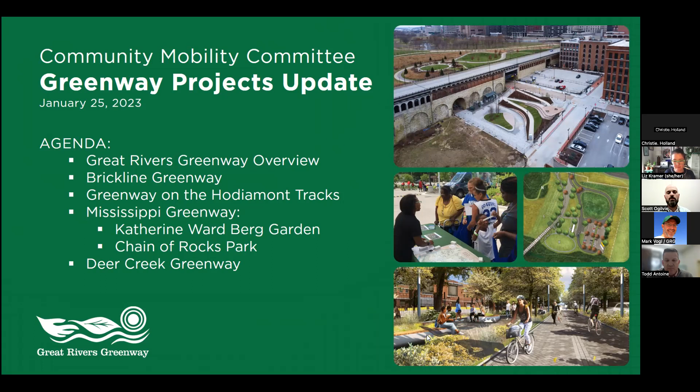As Christy said, we're going to talk about Brickline, the Hodiamont Tracks, and then a couple projects within the Mississippi Greenway, then we'll finish up with Deer Creek. I believe everybody on this call probably knows all about GRG, so I don't want to waste too much time with an overview of our organization. But just for those of you who might not be completely familiar with us, we are the Regional Parks and Recreation District in the St. Louis region. We operate in the city of St. Louis, St. Louis County, and St. Charles County. We're funded through two different sales taxes, and we are actively building projects in 18 different Greenway corridors around the region. We're doing our best to work with partner organizations, administer federal grants when possible, and we've got a foundation that supports us as well, providing some critical funding for moving a lot of projects forward from one end of the region to the other.

So the projects we want to share today, this is just sort of an overview of how they connect with each other here in the city of St. Louis. We've got two projects in Mississippi Greenway: up at the northern end is Chain of Rocks Park, associated with Chain of Rocks Bridge, and then near downtown is Katherine Ward Berg Garden. Brickline Greenway is a really massive project connecting a lot of different neighborhoods in the heart of the city. And then transforming the old streetcar line on the Hodiamont corridor into a greenway, and extending the Deer Creek Greenway from River des Peres west through Maplewood and into Webster Groves and Brentwood. And just as a reminder, our whole mission is not necessarily to act as a typical or traditional park and rec agency, but it's really to make these connections between parks and other destinations around the region. We do that by constructing trails, conservation areas, adding amenities and trailheads, and ultimately providing connectivity around the region.

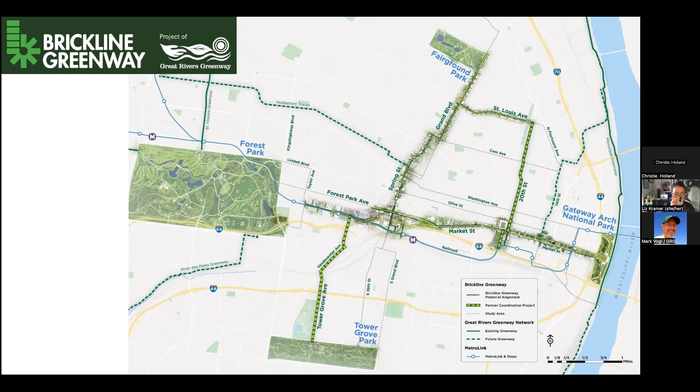So it's really different from other Greenway projects we're building around the region that tend to be one single line. This one is really a network within the greater Greenway system. As you can see, there are a lot of different routes. We're studying some parallel connections and loops, but it's really intended to connect a number of really great neighborhoods in the city with four outstanding parks and lots of other destinations along the way.

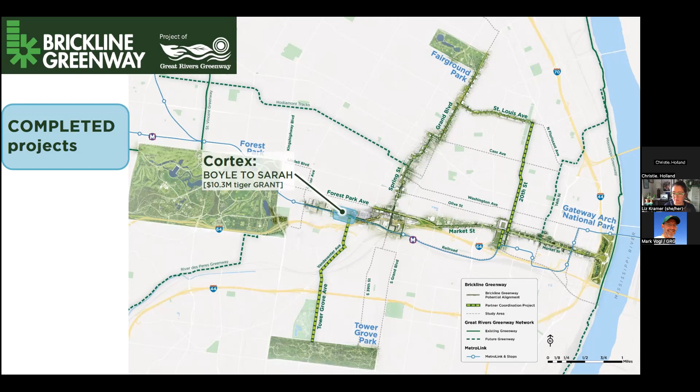Want to share some status. We actually built a small portion of what was then Chouteau Greenway, but it's part of Brickline Greenway, with the new Cortex Metrolink station that opened in 2018.

We have a series of projects underway right now. We're building a section from 22nd Street to 20th in association with the new Major League Soccer Stadium along Market. We've been awarded a CMAQ grant to build a connection from the Cortex station to the Grand Metrolink station within the Metro corridor. We're actively designing a section along Mill Creek Valley that'll extend the Greenway from the Major League Soccer Stadium west along Market Street to Compton, touching on Harris Stowe State University and the Wells Fargo campus.

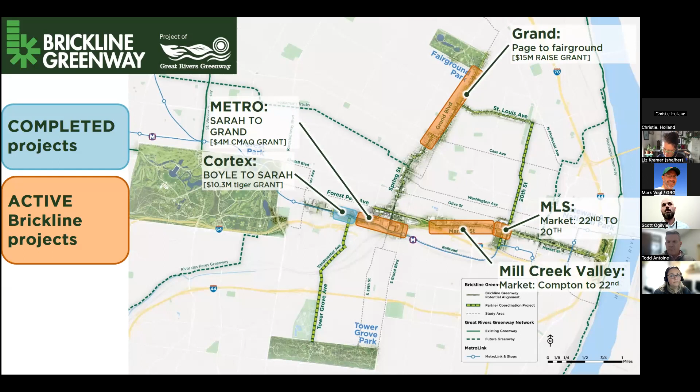And then a couple of really exciting projects going north along Grand Boulevard from Fairground Park down into Midtown. We're receiving a RAISE grant for that, and then extending it along Spring Avenue to the St. Louis University campus.

We'll be studying, we just have a concept right now, a connection along St. Louis Avenue, on the northern edge of the NGA. And we've just finished a feasibility study to develop a crossing from the Foundry to the Armory through the east and westbound lanes of I-64, breaking down a really critical barrier for north-south access in that location.

We've submitted for a Reconnecting Communities planning grant that hopefully will allow us to continue moving that project forward. And we're in discussion with the Washington University Medical Center, BJC, and Cortex about extending the Greenway from the Cortex Metrolink station west along Clayton Avenue into Forest Park at the location of Clayton and Kingshighway.

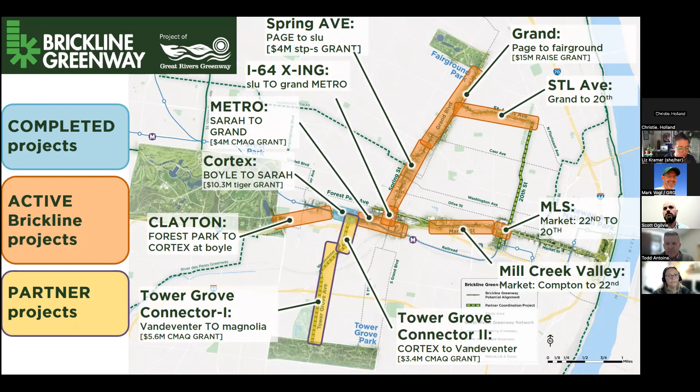We're also partnering on a few projects with other city departments. Of course, the Tower Grove connector—this one will be going to bid soon. There's a second phase of that project that will bring us up to the Cortex station at Sarah. And then 20th Street, from Major League Soccer Stadium at Market all the way up to St. Louis Avenue.

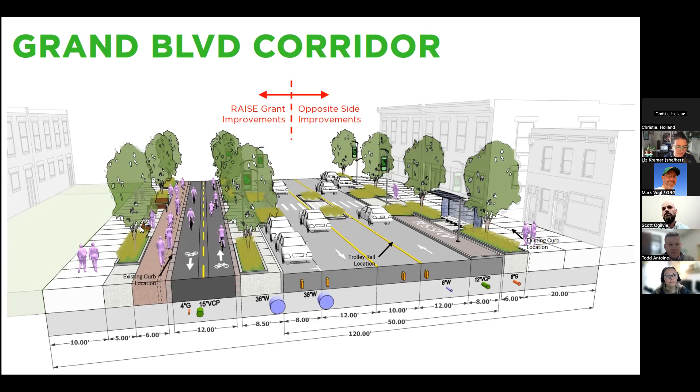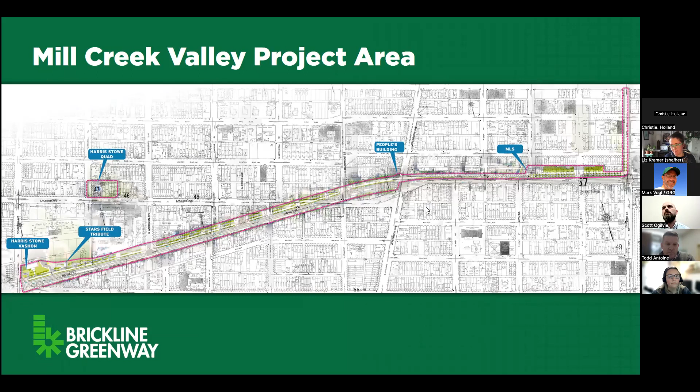22,000 primarily Black families and residents were displaced from this neighborhood in the late 1950s to give way to what was then called urban renewal. And this is the development pattern of the same area today. I'll toggle back and forth a couple of times so you can really get a sense for how dramatically that neighborhood has changed.

This is the new soccer stadium on the right-hand side. Again, this is Market Street. We get to the intersection of Jefferson and Market at this point. This was the location of what was known as the People's Building. It was the center of the neighborhood. A lot of the institutions and businesses were centered right there. It was really the heart of the neighborhood in a lot of different ways.

We're working with a local artist, Damon Davis, on ways to commemorate the neighborhood and some of the places that existed along the way. And then as we get further west, closer to the Harris-Stowe campus, we pick up Stars field, which was the location of the Negro League Stars team back in the time of the Negro Leagues. So again, a lot of opportunities for commemoration and interpretation.

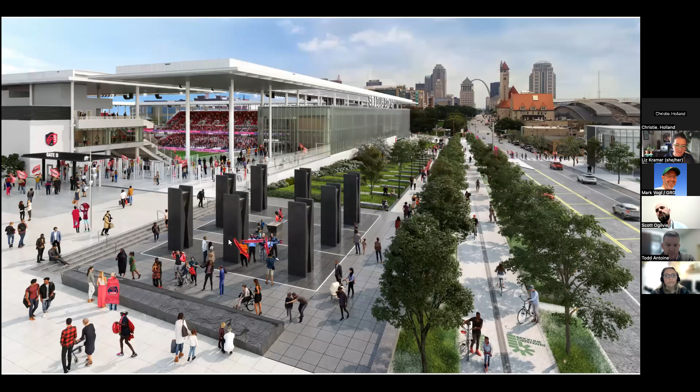This is a rendering, an early rendering from a couple of years ago that showed the design of the Brickline Greenway next to the soccer stadium.

And this is the Pillars of the Valley, the monument that Damon Davis has designed, again to commemorate the neighborhood that was there. In the distance, you can see these seat walls that are located at the actual lot lines of the residential properties that were there at the time. And so when you have a chance to go out and experience this yourself, we have the addresses of those former residences, and you really get a sense for how densely developed that neighborhood was and what we lost as a community.

These are some photos of the project as it is completed. I mentioned the importance of being accurate in our renderings for North Grand - we want to make sure we're delivering on those designs as accurately as possible. Each one of these pillars is a symbolic hourglass. The intent is to show that time has stood still. On the inside of each of these panels is a quote from a resident who used to live there. And then some photos taken just last week of the Brickline construction going in.

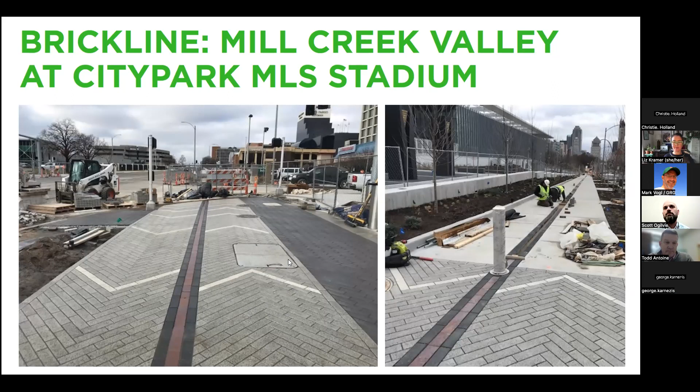This is the actual design element that will be consistent throughout the Brickline Greenway from one end to another. As we get closer to intersections, we have these chevron patterns in the pavement that will be a warning to people that they're coming close to an intersection. So it's both an aesthetics thing, but also a safety measure to warn people they're getting close to a zone of traffic. And then a sort of before and after of what that zone along Market may look like.

Here we go. The idea is to use some of that additional lane of traffic for the Greenway development, and then on the northern side of the corridor, more of a pedestrian zone for seating areas, hopefully an enhancement to the Harris-Stowe campus as well.

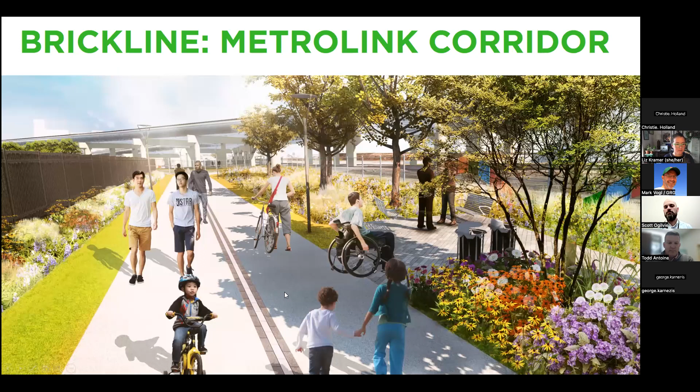This is a rendering of the zone between the Grand and Cortex Metrolink stations within the Metro right-of-way. It's a very narrow corridor, but through the use of landscape, paving, and safety measures like fencing and lighting, we think this is going to be a really nice user experience to go from one end of the corridor to another and access a lot of those new developments popping up in the area, like the Foundry and the Armory and others.

And then I'll turn it over to Todd to talk about a new position we're undertaking with respect to equity and economic development. Great, thanks, Mark.

So Chris Peoples, who joined us about a year and a half ago as a project manager, recently took on a new role with us here at Great Rivers Greenway. He's now our Equity and Economic Impact Director, and he is focused primarily in the city of St. Louis, looking at opportunities where the greenways are going in, the Brickline being a prime example here, working on how the greenway can help benefit economic development and revitalization along the various neighborhoods. His position is funded partially from St.

Louis Development Corporation, as well as from several private institutions, some of the banks we have here in town, are helping to fund his position. You can kind of look at the various things that he's just getting started on. He just started working in this position in the fall, so he's getting up and running.

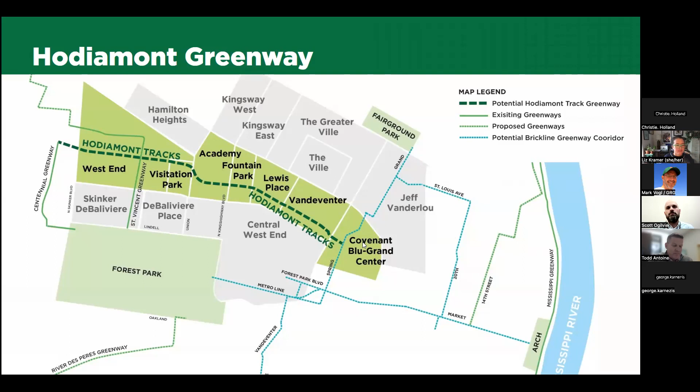We conducted a whole series of community events and surveys. We had a lot of outreach to determine if people really wanted to transform this old infrastructure into something different. We've worked with the residents of these 7 neighborhoods that follow the potential Greenway, and we've determined that there's quite a bit of support for reinvesting in this old transit infrastructure and transforming it into something else.

We're continuing to do a lot of design work, working with a really creative design team on ways to transform that old streetcar line into an open space that will function for everybody.

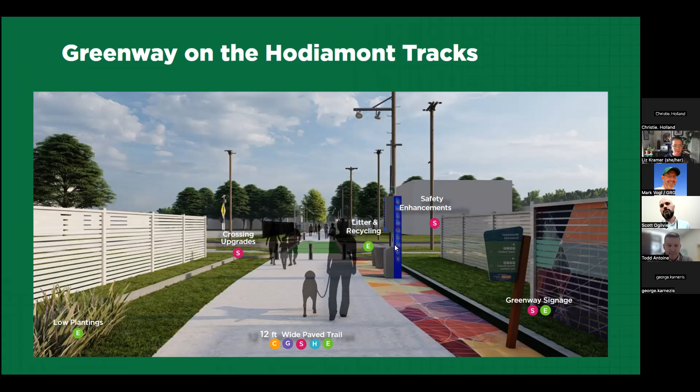This is a really interesting diagram. The letters shown throughout correspond to different goals that the community said were important, whether it's safety, environmental quality, connecting communities, or whatnot. Every design element they're incorporating goes back to a value or a goal that the community told us was important. I think they're really doing a great job coming up with ideas for enhancing the corridor and trying to raise the value of the neighborhoods along the way.

There's paying particular attention to the road crossings, of which there are many from one end to the other on the 3.5 mile route. We want to make sure those are as safe as possible for the Greenway users. Some of the elements they're incorporating are to narrow the street, to slow traffic, and give people a visual cue that they're coming up to the Greenway.

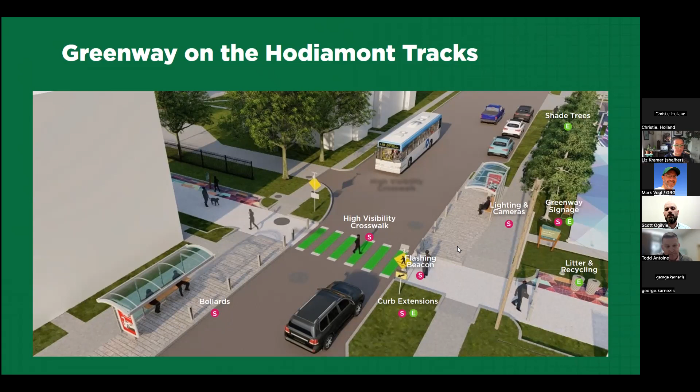Also working with Bi-State on the potential for relocating and providing more enhanced bus facilities. We recognize that the Greenway will not just be a recreational corridor, but will be used by people to access transit and get to other destinations. So as much as we can make this Greenway function for a wide variety of people, make it as safe and attractive as possible, that's some of the goals we are undertaking.

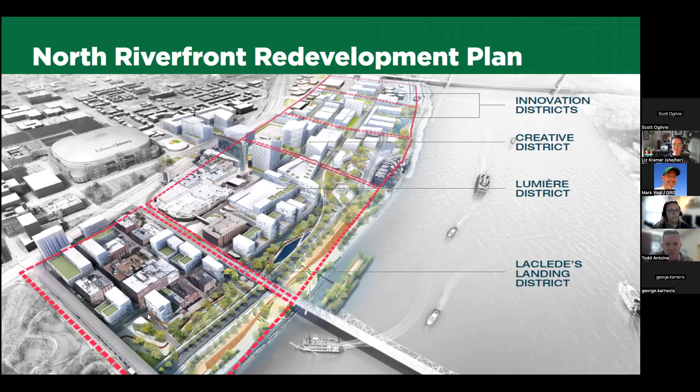You can go to the next slide. A number of years ago, 2015-16, we worked with the city and St. Louis Development Corporation on what was called the North Riverfront Open Space and Redevelopment Plan. This is one of the slides showing at the time what a continuous open space area could look like, with Eads Bridge at the bottom of the screen heading north—an enhanced open space with improved access for pedestrians and cyclists, but also an economic development plan looking at infill and redevelopment within Laclede's Landing, which is why you see a lot of infill within what are probably now parking lots.

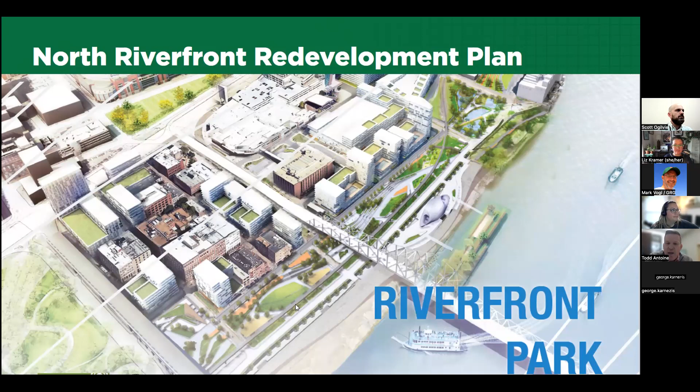Focusing in, the area where the cursor is right now is our Ward Burg Garden, which has been under construction and will be opening up very soon. Also, if you're familiar with the Landing, there was a parking garage down there. The plan at the time envisioned what this would look like with that removed, and I'll show an image of that as we go on.

So if you could advance the slide—here's a picture taken, I believe, last spring or so. The garden itself has been done. It's named Katherine Ward Burg Garden because she donated money upon her death for us to do a project. Working with her organization, we decided to help put money towards this first part of the project, which is why it's called Katherine Ward Burg Garden. It's a great space that will be used for programming for visitors, residents, and people working in the Laclede's Landing area.

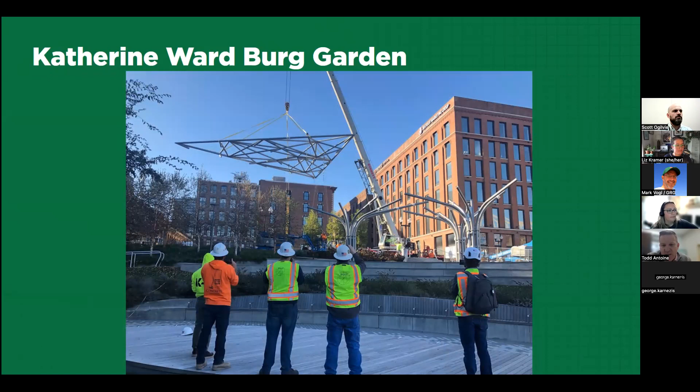If you go to the next image—this is one of the things I put in here. If you're familiar with it, the project looks like it's been done for a long time, which has been the case. We've been waiting for these trellis structures to get fabricated and installed. This is a photo taken right around Thanksgiving of them being installed. We're real excited, we're getting ready to open this up very soon.

This is another image I took when I was down there a few weeks ago, looking at the trellis installed. Keep your calendar open for Sunday, the 23rd of April—that's when we'll have a formal ribbon cutting for the event, but it will be open before then as well. Go to the next slide.

You can see, I did a little image over to the left. You can see the parking garage, which we purchased that property late last 2021, and worked through the process for demolishing it, which you can see was well underway when I went out there. You can see how it really opens up the view down there in the Landing. It's going to make a great opportunity to look at the river and the railroad train going by. So a lot of neat things.

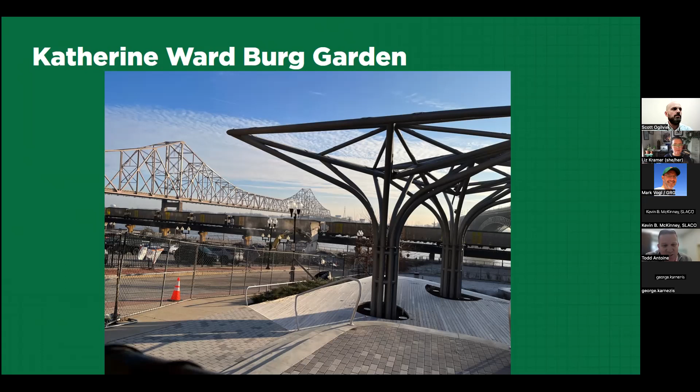If you go to the next slide, Mark, you can see that's a photo taken of it. So we'll be on this property—for right now we're removing the rubble that was there. We're going to add some topsoil and fill, do some minimal landscaping at this point. The idea was to get the garage down, because it was really becoming an unsafe structure.

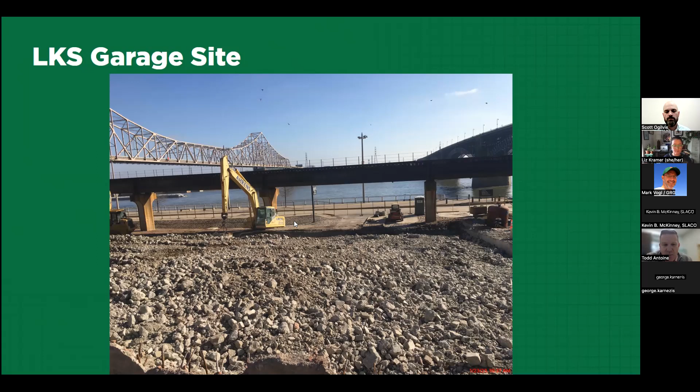Get the garage down, still working on the whole entire vision for what the site could be. I envision it's ultimately going to be similar to what we see on the Katherine Ward Burg Garden, just a continuation of that. That's the big vision, but right now it's going to be landscaped, an opportunity—probably a convenient dog park and place to look out along the river and see the activity there.

Okay, we'll hand it over to Grace, and she can talk about the Chain of Rocks Park. Hello, everyone, I'm Grace Wright, the project manager for this Chain of Rocks Park project on the Mississippi Greenway.

After years of community engagement, planning, design, and securing funding, we have hired a contractor to begin transforming the current parking lot, shown on the left, into the Chain of Rocks Park you see on the right, beginning this spring.

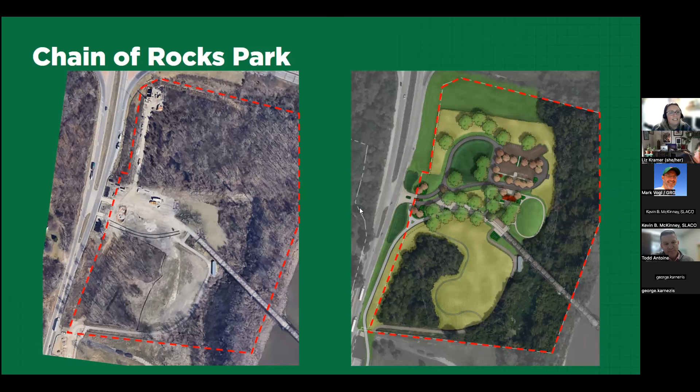I wanted to share some of the fun things that will be constructed soon. We'll have local artwork reflecting the Mississippi Flyway migratory route and the Chain of Rocks River geology, a picnic pavilion for group gatherings, and direct walking and biking access to the historic bridge and the river overlook.

We'll have an event lawn in the back behind the trees with a round walking path around it where they can have concerts or other events, and a food truck alley with water and electricity hookups for community gatherings.

The park will also include restored habitat and ecosystems. Wetland restoration and woodlands will provide food and shelter for native wildlife on site, including migratory birds. We're already working on the 1.5 acre reconstructed prairie, shown to the right of this photo.

We'll be providing a permeable parking lot, visible on the left, and rain gardens to reduce stormwater runoff and enhance water quality running into the Mississippi River. Also important, though not as fun, we'll have safety and security features, restrooms, and a drinking fountain. All of these improvements are planned to be complete by the end of April 2024.

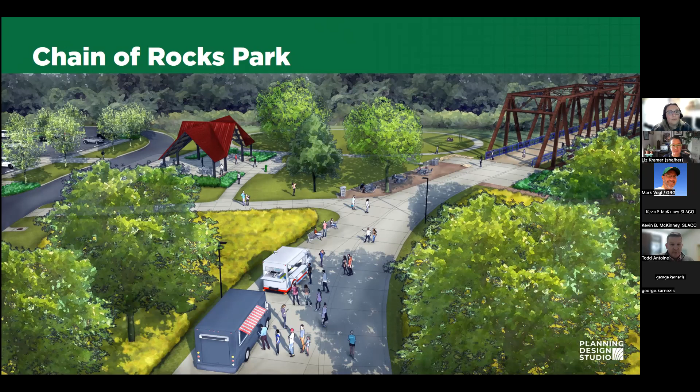As for the future of the Mississippi Greenway to the north, GRG and MoDOT have been working together to plan a Greenway route under I-270. MoDOT has left space for a greenway under the highway near Riverview, shown in red, and there's another route we're looking at, shown in yellow.

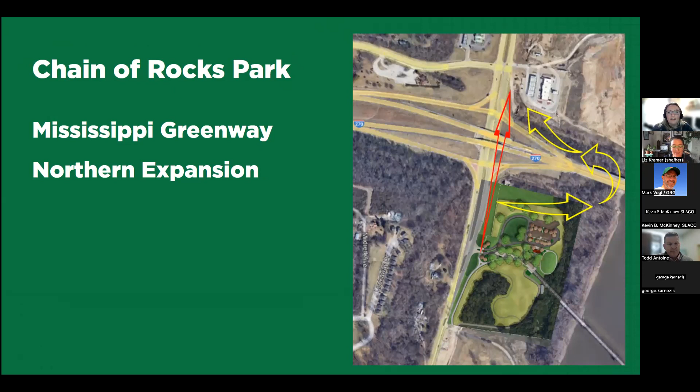I hope to see everybody there enjoying the park in 2024. All right, that brings it to me.

The part connecting at the Canterbury and McCausland intersection to the River des Peres Greenway is our main connector to this long and extensive River des Peres Greenway, which is almost complete. We're only missing a section from that point to Forest Park—that phase is a future project we'll be working on.

This Deer Creek Greenway connects the city of Webster Groves and the existing Greenway in Maplewood, then north to the city of Brentwood, to the big Brentwood Bound project some of you know. This Deer Creek Greenway is a $6 million project for which we have applied for federal transportation funding of $3 million.

We are working with the city of St. Louis to make improvements to the intersection at Canterbury and Ellendale/McCausland, to improve the traffic signal. We're going to address the free flow right turn from McCausland to Canterbury to incorporate pedestrian movements at that intersection, making it safer.

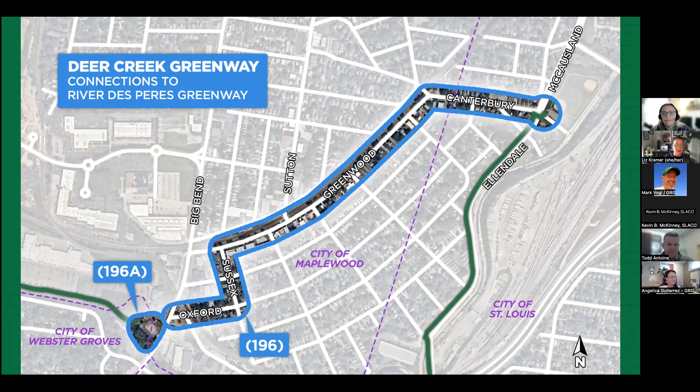So I believe I have the close-up of the City of St. Louis scope of work. You'll see on the north side, or the upside of the street, we have the 12-foot wide shared use path for greenway use.

We have all the high visibility crossings. At driveways, we're going to create solid green pavement markings for enhanced visibility for drivers crossing those driveways.

You can see in the middle the speed table I was mentioning, with white and green paint at the crossings, following some of the NACTO guidance for crosswalks. Then the intersection, which will be a four-legged intersection, improved to create appropriate signal timing for the project.

The city of St. Louis is contributing funding to Great Rivers Greenway for this project, both to create a new signalized intersection with state-of-the-art equipment and to take care of the pavement on this street, which is also in need of repair.

And this is the detail of the intersection, showing that we're closing it. We eliminate the free right turn lane I mentioned before to capture the pedestrian crossing timing into the signal operation, instead of risking your life trying to cross on the right turn lane—we incorporate it into the traffic signal operation.

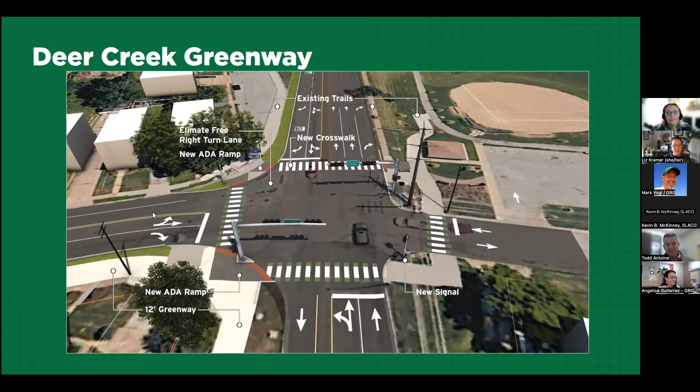And I believe that's all we have so far. I hope I answered some of those questions in the chat. I was watching, Kalina, you had questions about those crossings—please let us know if we can answer any other questions.

Thank you, GRG team. We have a couple of questions in the chat, just a few minutes to answer them. I'll start with a straightforward one, then get to John. As a follow-up on the street crossing infrastructure, are there any plans for bike, HAWK, or Toucan style crossings, or any other kinds of street crossings being considered in these new projects?

I can respond to that, and maybe Grace or Mark have more details. Every time we cross a street or have a driveway, we look at all the methods we can use to enhance visibility for safety. HAWK signals are considered in some of our projects—I don't recall if on this one, but for other greenways we've installed HAWK or pedestrian signals, or flashing beacon signals, activated with a push button or an infrared detector that detects people walking on the greenway and starts flashing.

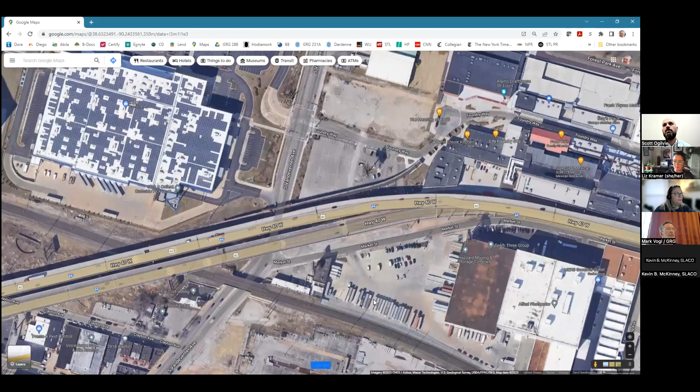I just had a quick question about Mark Vogl's presentation of the Brickline. The only missing gap that was not addressed is that critical piece between Compton and Grand, I believe — if you could pull up your map. So is there any thought as to how that's going to connect, or what are your planning phases right now to link up this critical piece?

John, if I understand the location you're talking about, it's where all the ramps are between I-64 and Compton over to Grand Boulevard. We all know this is a very complex interchange. If I go back to the original diagram that showed all the different phases, you'll see that it is a gap in the planning right now. Hold on a second.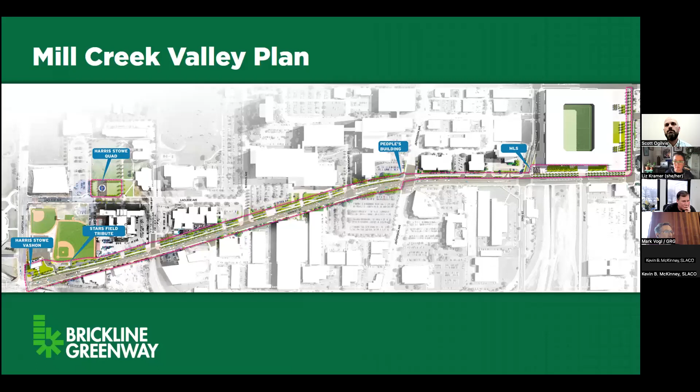There we go. So this is the area we were just talking about. Hopefully a lot of you are aware of the I-64 PEL study — PEL meaning planning and environmental linkages, thank you. There was a great open house last week where MoDOT presented alternatives for the long-term planning of the interstate, because this area is really going to be impacted quite a bit by decisions made by a lot of partners: Great Rivers Greenway, the city, MoDOT, and others.

We really can't invest a whole lot of time figuring out what that gap is going to look like in the long term until some of those other decisions are made, because there's a lot of possibilities for how this area might be developed. We are looking at an interim route.

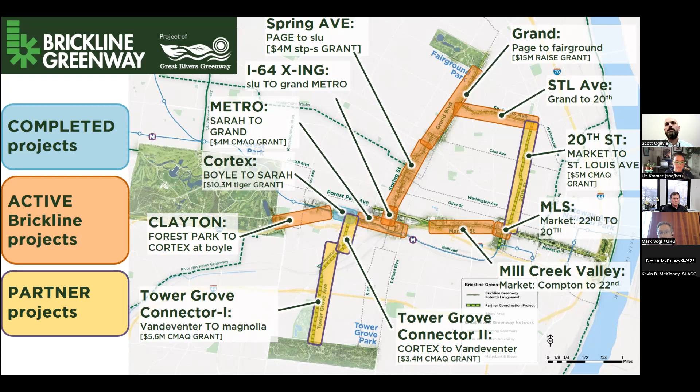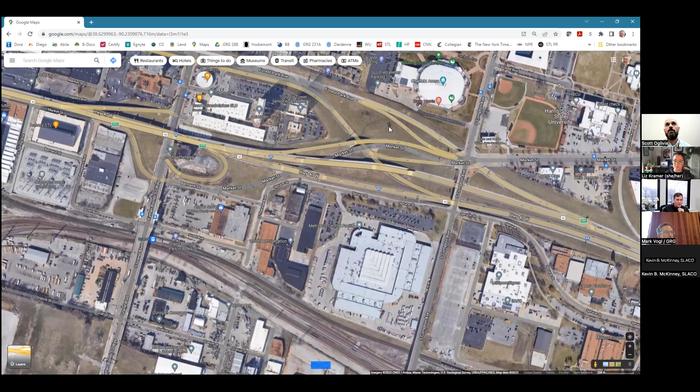Scott? Sure, I just wanted to mention a couple additional projects the city is building that connect into that Brickline framework. One is a greenway, actually under construction right now on 21st Street, that heads south, goes underneath I-64, then over to Scott and south on Jefferson. That's a key linkage across the highway, or underneath the highway, into the Brickline network.

And then the other project is the replacement of the Compton Bridge, which we've discussed in the past. When we replace that bridge, it'll have a shared use pathway on one side, and that will almost link up with GRG's Market Street project, which goes to Market and Compton. That's another critical linkage north and south across the rail corridor to the highway.